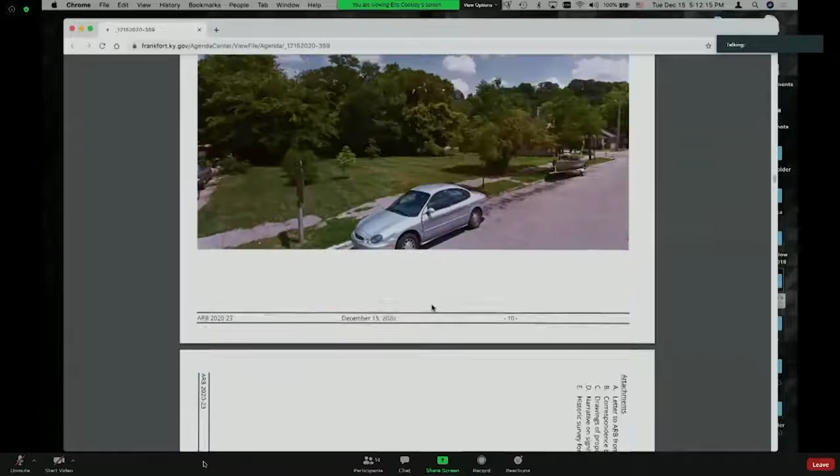Thank you, Jordan. Okay. Did Mr. Cockley have something he wanted to say? No, Jordan covered it. I was just going to add that that's a conversation Jen and I have had as well. And so we were looking to get through this part of the process before spending the extra time and energy to get that consolidation plat recorded. So, but great question. But yeah, we'll make sure to get that done before permits are issued and things are moved. All right, thank you.

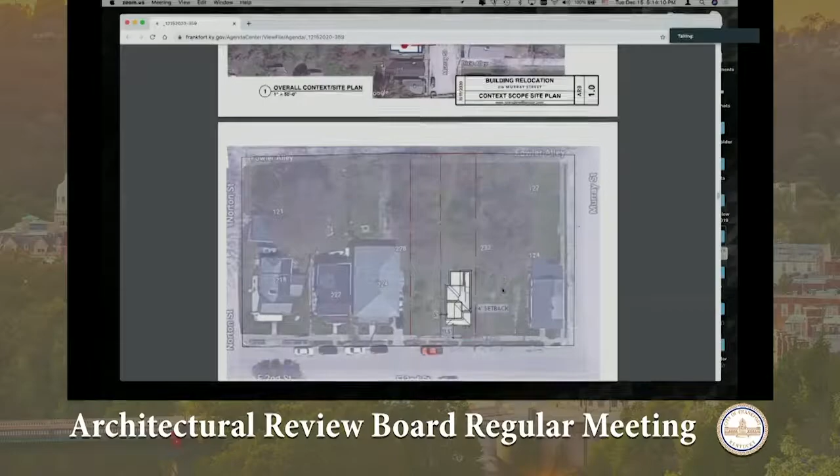And Jordan, this is Jen Oberlin. This might be a better question for the architect, but I'm just curious. Is the new foundation going to be raised out of the floodplain, like higher than the homes next to this if moved? Let me pull up here. I'm going to share my screen again. Wrong thing.

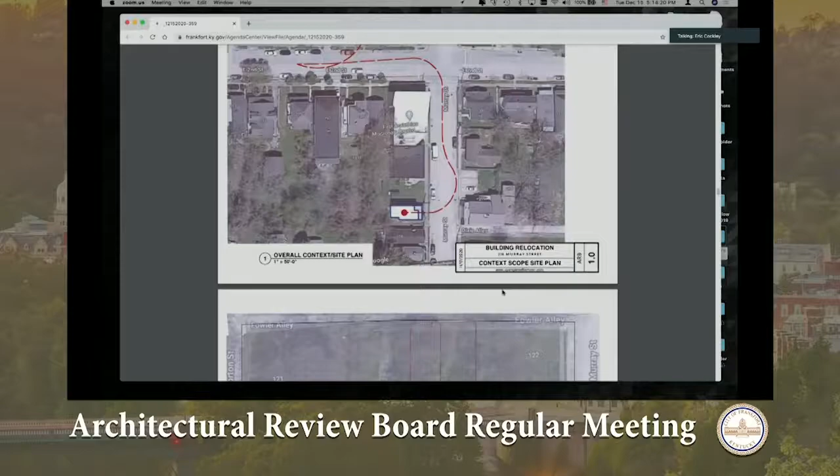It will be raised out of the floodplain, yes. Sorry, I'm having a hard time finding that. Yeah, it will be sufficiently raised above the floodplain. I think the way that it might be on your site plan that was submitted, there may be a portion that was within it, but it needs to be raised a foot. And there will have to be a stream construction permit and all that. That will have to be submitted to the state as well. There we go. I'm sorry. I missed it on my attachment. Yeah, if you look on page 4 of your attachments, it shows the floodplain elevation. But yeah, we'll have to be sufficiently raised. Oh, yeah.

All righty. Any other questions from the board? Okay, thank you, Mr. Miller. Would the applicant... okay, we need to turn on our, there we go. Sorry, I'm here. That's all right. It's a technological strange day.

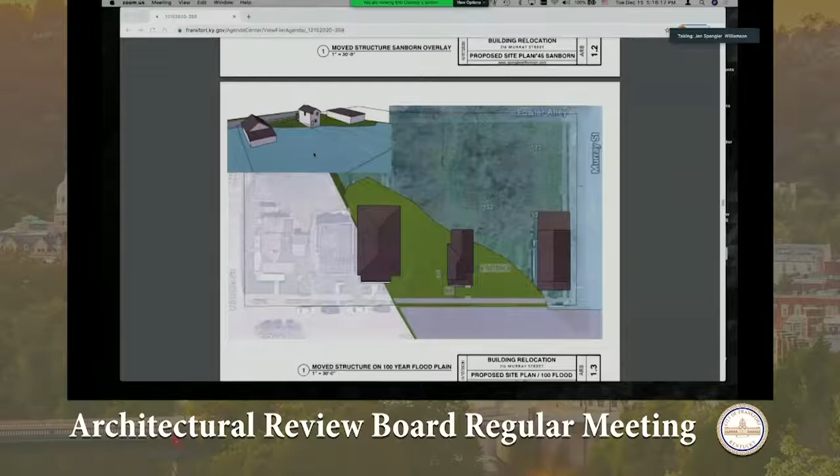Yes, okay. Let's see. With regard to the lot and the flood elevation, we've had a base flood elevation survey completed by Harry Girdler. We have pretty good information on the lot line survey, although he has not fully executed the lot line survey. He wanted to check an additional reference point. But we have a general sense of the width of the lots, and that is what we are showing in the background of the drawing. So we believe that the structure will sit with the setbacks as shown in the application drawings on the middle lot.

If after Harry performs the lot line survey, we find that we do not have sufficient space. Right now it looks good, but if he goes through all that and finds some sort of discrepancy against what he's already mapped out, we have the ability to tie the lots together, and that's why we are securing both of the lots. Okay. But we are aiming to locate the structure on the middle lot freestanding, so that we wouldn't necessarily need to do the lot tie.

The base flood elevation survey was completed because that was a part of our due diligence on vetting this lot. Essentially, the way it works is the base flood elevation is mapped and shows on this drawing that's on the screen. 2 feet above the base flood elevation is the point where we can construct new and put a floor elevation. That pinpoint is just about in the parkway between the grass, between the street and the sidewalk. There's a monument marker that he has out there for us.

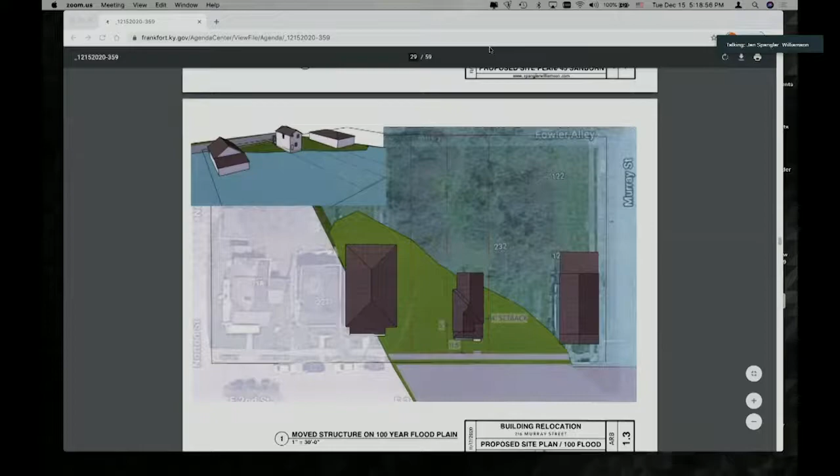Okay. Was there anything that you wanted the commission to know beyond what's in the staff's report? Well, I might just reiterate what we put in our letter to you, which is that we really find this to be a very unique situation. Maybe moving a historic resource in a district isn't always the most ideal situation, but in this instance, in order to allow the church to continue its mission in this neighborhood, and with the availability of a feasible lot in good proximity that can maintain the structure's contributing status to the district, we felt that we wanted to, in this very unique instance, try to do this as a problem solver.

Okay. There are three conditions that staff have recommended. Do you have any problems with any of those? No, I think those are all conditions that we certainly can meet. The permit, getting the building permit, which we certainly will do. Additional projects, if we get to a point where we're going to do more with the structure.

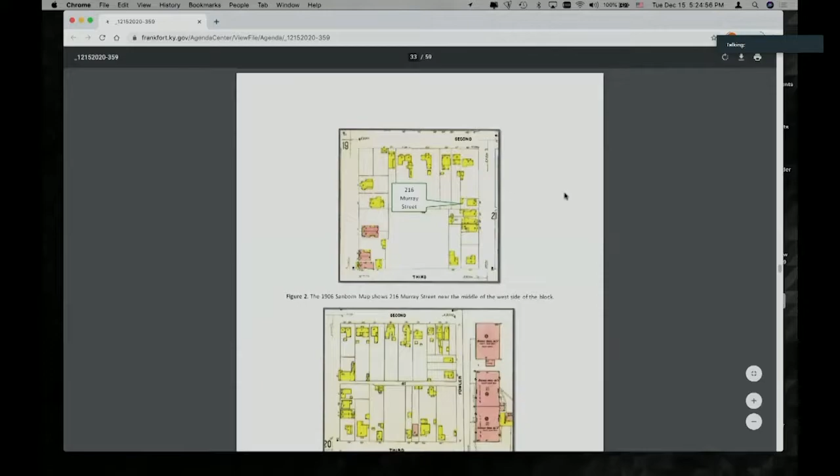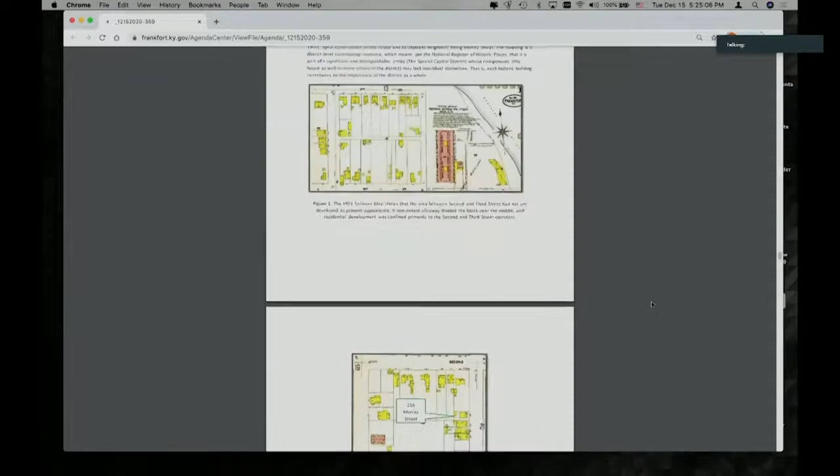I don't know. So I think it's, yeah, there you go. Wait, you just passed it. One more down, I think.

So we are locating the structure on the middle lot, and the site of the Winnie Scott Hospital, as you can see there from that 1940s, I think this is the 1942 Sanborn, is on the next lot over. And with the overlay of Harry's survey and the layout that we have from the field measure, it looks like we're going to have, I would guess, certainly a 5-foot to a 10-foot setback from the footprint of that

site. There was a separate freestanding structure that was on the site that we are on. And my understanding is that both of these structures were destroyed by fire, I think it was within the last 30 years. So I'm not sure what kind of method was used for removing the debris of the structure, but at the surface of the grass, we don't see any evidence of foundations or anything in this location that we're proposing.

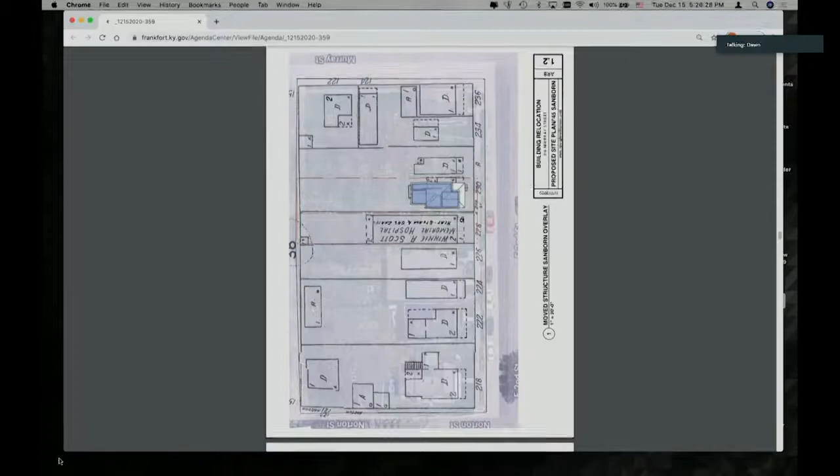Oberlin, did that answer your question? Yeah, and I mean, I'm assuming that if anything was discovered, it would be addressed properly. One other consideration, there's no removal of mature trees or anything like that. Everything that's there is relatively young, correct?

Yes, I believe so. We are going to have to remove some of the sort of scrubby vegetation that's there. There's a tree in the parkway that certainly will have to be removed because it's kind of in the trajectory of the move. So, yes. So I don't think anything in the area where we're placing the house that is towards the front of the lot out of the floodplain is mature.

And then, I'm sorry, I do. Well, this is such a unique proposal in terms of we don't see something like this very often. The house in its current state, and I'm going to assume, Jordan, you can answer this, and maybe Barrister Logan's going to say that's not even in your purview, but is the house in its current state up to code? I mean, there are no open violations from the city against the structure.

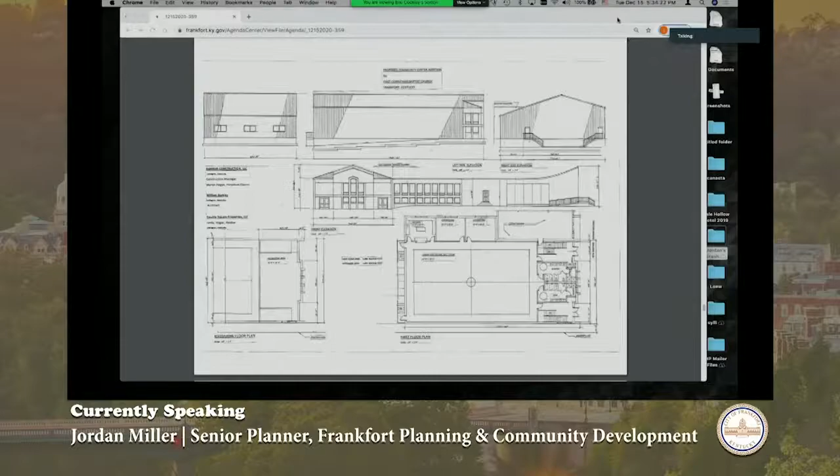Jordan, I'm just curious about the height of the proposed addition compared to the structure that's currently there. Yeah, here, I'll share my screen right now and show you. Okay. So if you see my cursor here, this is along Murray Street. If we're looking at it from Murray Street, here's the existing structure here, and then this is the proposed new structure here, the addition. So it is just about in line.

I believe that says 30 feet there, and this one looks like it's about 29.10, so almost identical in height. It does have a different type of roof. It's just a typical gable style roof, where the other one is kind of a more contemporary, strangely sloped flat roof. And are the materials going to be two different roofing materials? No, I think you can see here, the standing seam metal on the sides here. It's almost like a parapet that comes up, reaches the point of the gable and comes down. Okay.

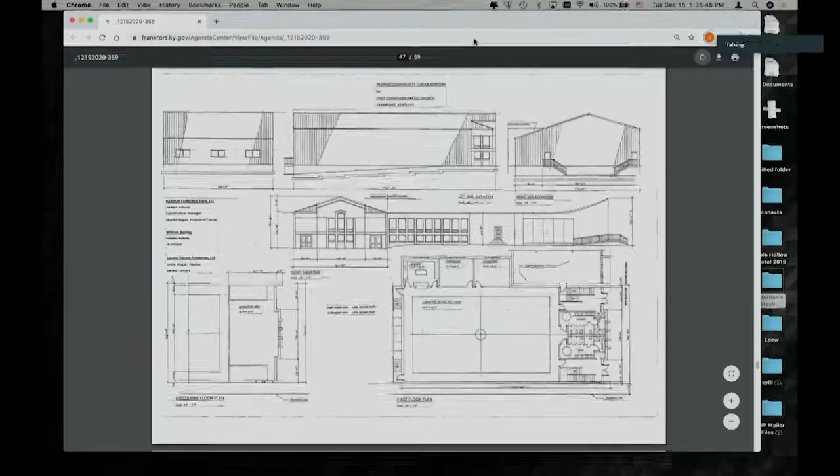And one more point of clarification about the design. The bricks will face Murray Street? Yes, that's correct. Okay. Ms. Sams, did you have a question? I did have a question. It was kind of the same one about the height. When I was reading the plans, it looks like the highest point of elevation on the original structure is 28 feet, if I'm reading that correctly. And then the height of the addition, the roof line, looks like it's 29.8. So that is a little higher than the original elevation.

So I don't necessarily think I have an issue with it. It just was something that I wanted to point out. Yeah, it looks like you're right, Brittany. It's kind of hard for me to tell. I think that says 28 feet 0 inches here on the existing. And the grading looks a little lower, it slopes down. To me, it looks like with the slope, it would almost be an identical height. That's just something I wanted to ask about and check on. Sure. Did you have any other questions? What about Ms. Johnson?

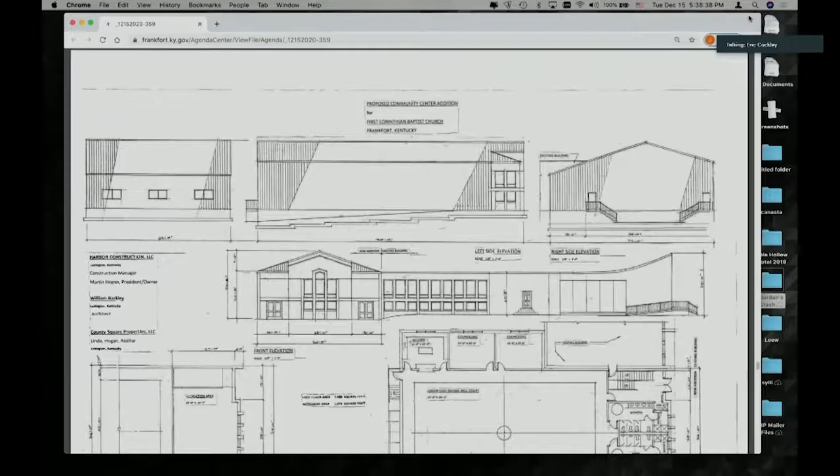There is not currently any vertical metal siding located on the exterior covering of the church. But let me share my screen real quick. Notice here the elevations with the vertical metal siding are located on the sides and the rear, so hopefully they won't be too prevalent with reference to the existing structure, unless you walked around it. Those being on the side. Right. Okay. Any other questions for staff?

Okay. Who's speaking for the applicant? I'm Richard Murphy. I'll be speaking, at least initially, for the applicant. I'm a land use attorney in Lexington, and I'm honored tonight to be representing First Corinthian Baptist Church. Pastor Leslie Whitlock is with us as well, and I think 2 or 3 of his deacons may be there in the office with him. Martin Hogan of Harbor Construction is on the line as well, and I think Chaz Hyde, who's a professional land use planner, may be on the line as well.

We really don't have too much to add to the staff report. It was very complete, and we do agree with the staff conditions of approval. We especially want to thank everyone who has worked on this, especially the Franklin County Trust, for their patience and perseverance in helping us get this project approved. This has been a dream of the church for quite some time. They came to me well over a year ago to further this project, and we've had a lot of help and cooperation from your staff, Mr. Miller, Mr. Cockley, and especially the Franklin County Trust and other public officials in the area.